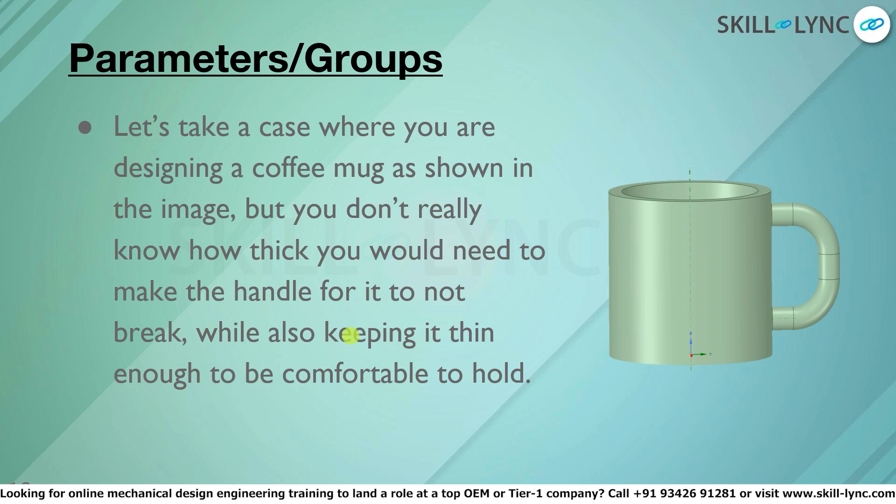It would be useful if we could select a couple of these dimensions or parts of the geometry and define them so we can have a list of them, or have them separately for ease of access. So we can touch upon them in future revisions or iterations, and select those specific parameters or groups of geometry to later edit. Sort of setting them as a favorite to access and edit easily.

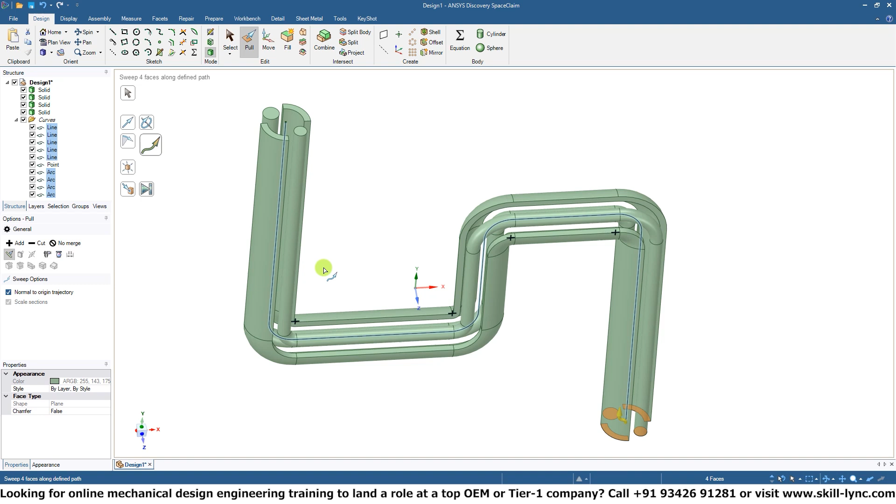Well, this is what SpaceClaim allows us to do using parameters and groups. So let's first go back to our ANSYS workspace environment. Let's select everything with Control A, delete that so we have a blank space, blank sheet.

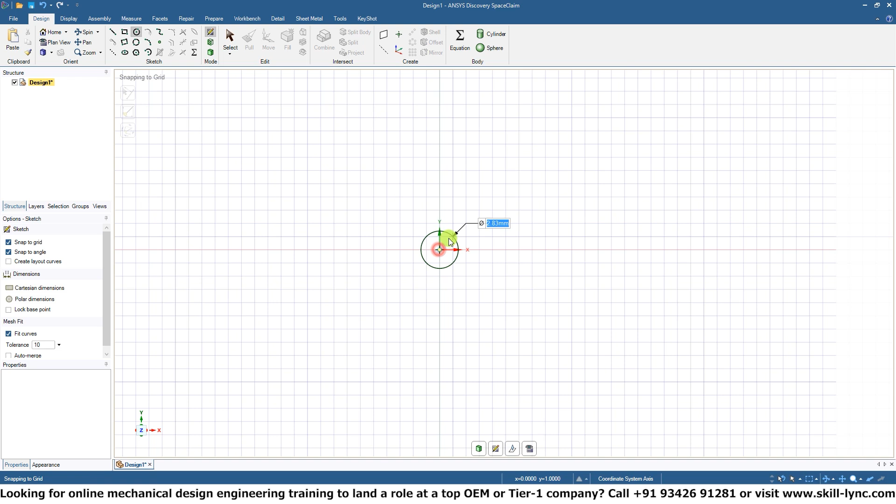Let's go back into sketch mode and try to sketch a representation of this coffee mug. We'll start off with the outer diameter of the coffee mug, and the inner diameter of the coffee mug. Let's extrude both of these dimensions, one there and this slightly.

Okay, now let's do a sketch. Well, first let's create a surface over here. Let's sketch on this new plane that we've created.

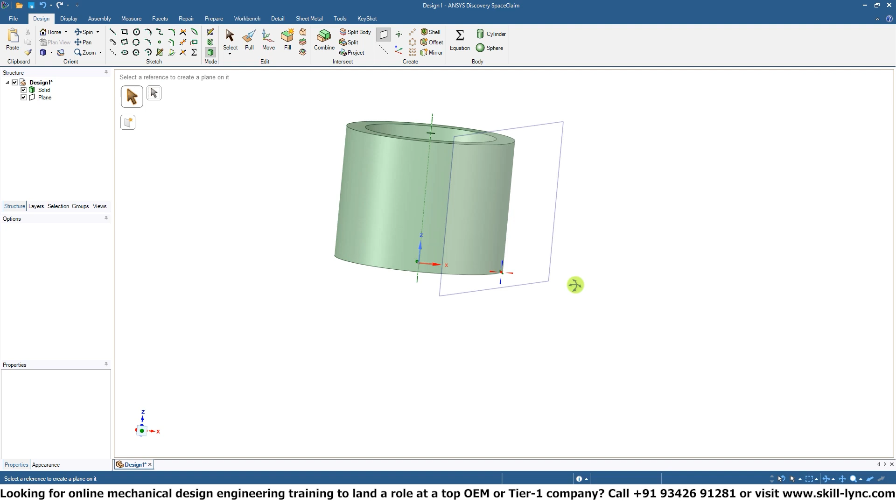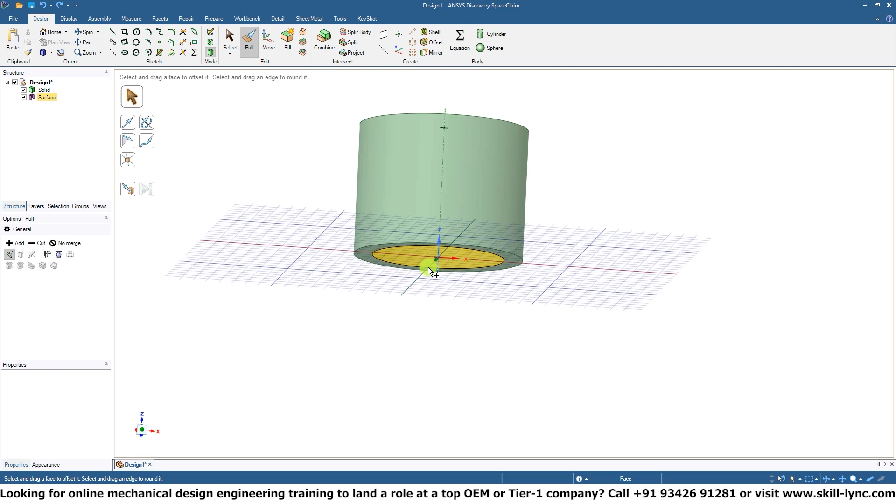Actually, before we create that plane, it might have been better to create a plane around the Z axis. Actually, let's go into sketch mode. Let's do sketch mode, and no, not that sketch plane. I want a sketch plane right through the center of the mug. There we go, just like that.

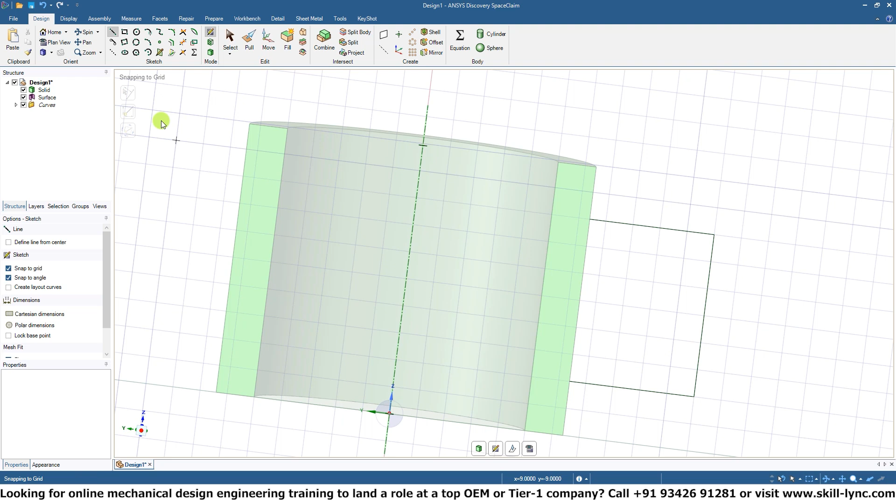So on this surface or edge, let's define the curve for the handle. We'll start from here, go up like this, then down here, from here go up to here. So that should be our sketch plane or sketch area. Let's define one point over here. Let's round off these corners.

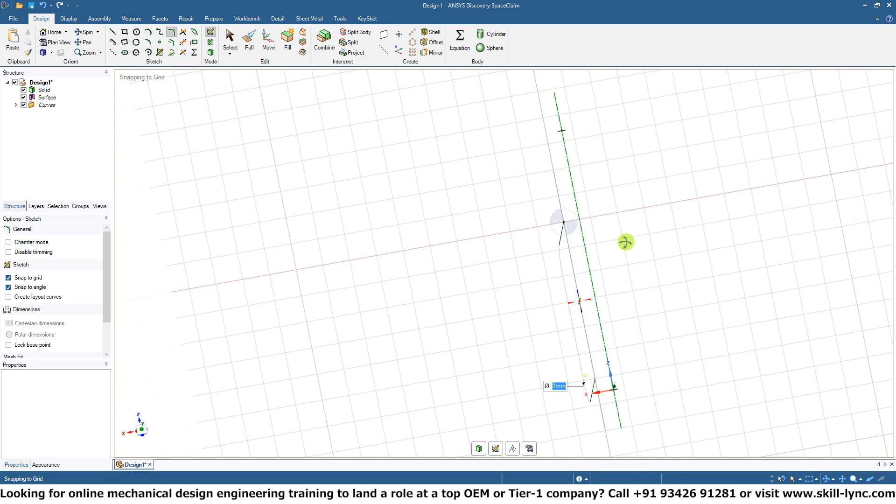There we go. Now let's exit sketch, re-enter sketch mode, but on this plane, on the point right along our handle sweep area. Okay, so what I've done, pretty much - if you struggle to follow along, please refer back to some of the tools or sections we've already covered in this course.

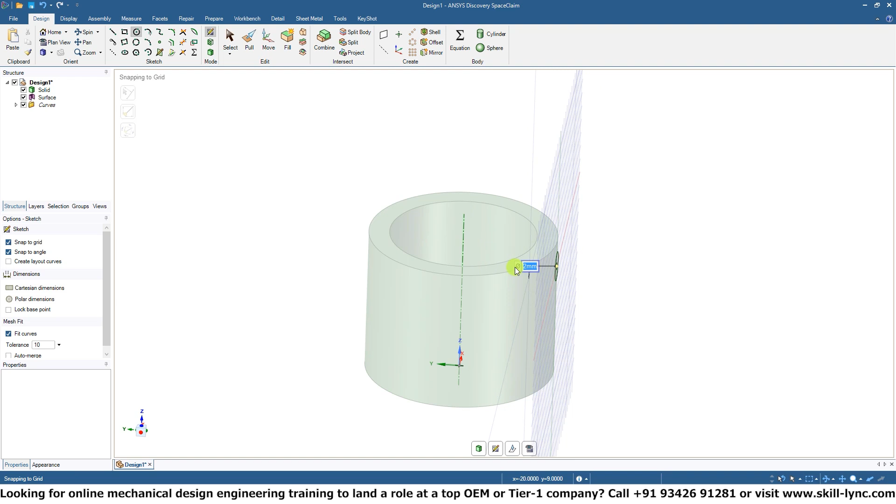Because I've simply done an extrude or a pull on a multiple geometry face to create a cylinder with a bottom for the body of the coffee cup. Then I've defined a sketch plane going through the center of the cup or through the middle, onto which I've drawn the area or sweep path for the handle.

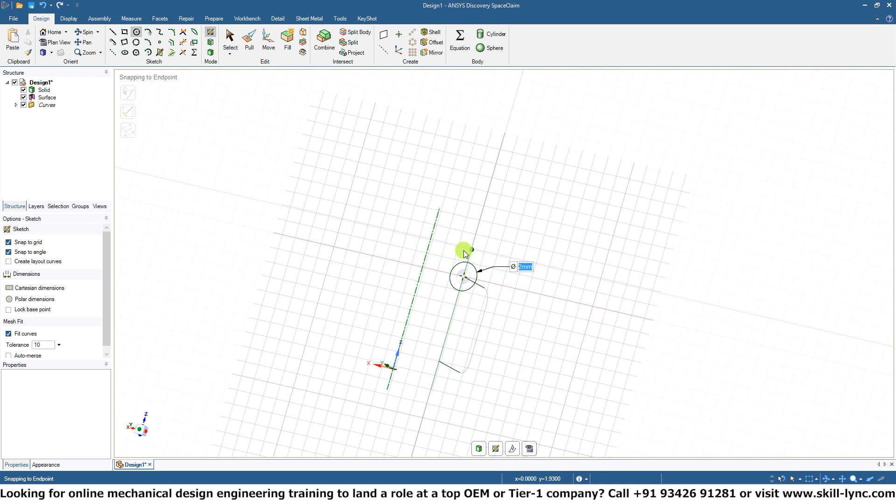I've done a point and selected this point as a new sketch plane, and then drawn a little circle to define the diameter of the handle. And now what I'm going to do is pull this along the sweep path right there to the end. Boom. And there we go. We have the coffee cup.

So now that we have the coffee cup, you can understand - hey, how do we go about actually editing this surface area or this part of the coffee cup? So what we can do, or how we can set the parameter, is if we actually select this area, this area, this area, pretty much the body of the handle of the cup, and select pull, we should be able to...

If SpaceClaim doesn't crash on me. Oh, that's okay. SpaceClaim is struggling a bit.

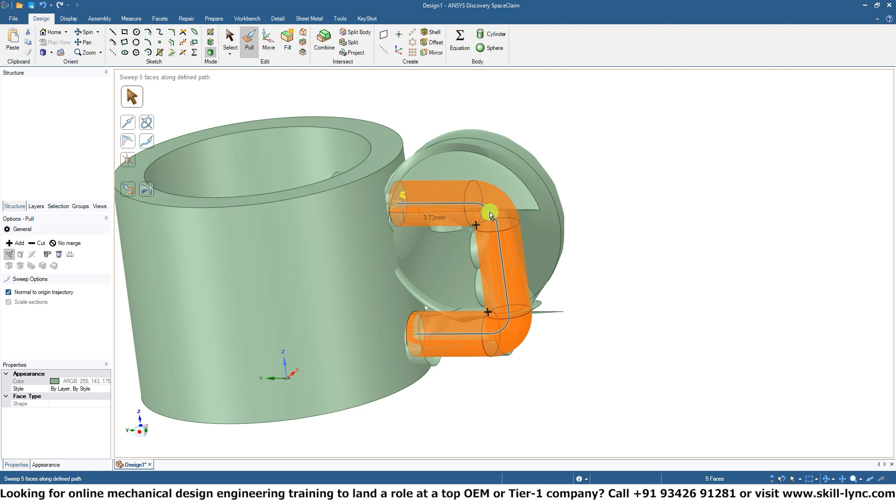Okay, we're back here. As you can see, if we've selected these bodies, or the body of the handle itself, we can use the pull tool to adjust the thickness of the handle.

The reason why SpaceClaim was having problems is, in this area where we have the radius of the handle in the corner, if you go above that radius, SpaceClaim fails to create that geometry, and that's why it was having a few issues and bugging out.

But just by pulling or selecting that geometry, you can see we have the text box appearing for the radius of the handle, which we can take up to, I believe, 1. You can edit this again just by typing in dimensions like 0.3 or 0.7 and editing the thickness.

However, next to all of the text boxes with dimensions that we've seen up to now, we see a little box with a P next to it. This is a parameter, or this is the groups that we are discussing right now.

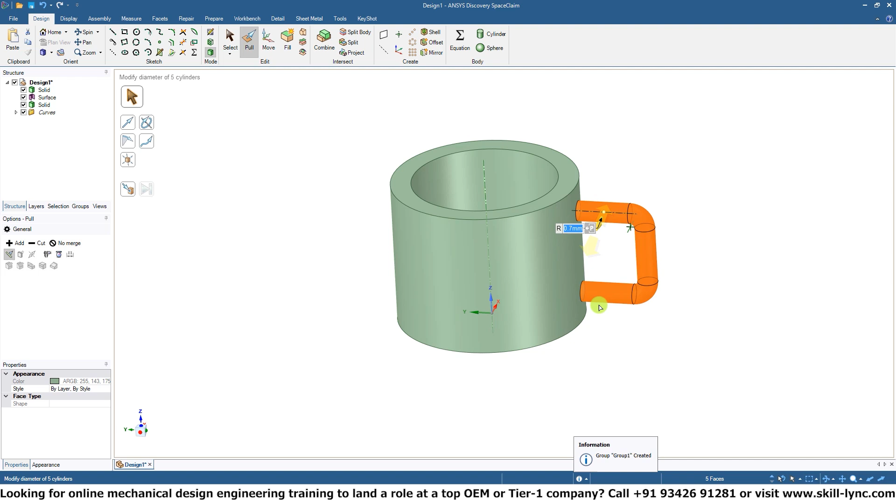If you click on this, you can see over here in the dialog box it says Group 1 has been created. So something happened. But where do we find this Group 1?

Well, if we go on the left-hand section, over here where we have the structure tree, there is a little tab for groups. If you click on that, it shows you all the different groups that you've defined. This is Group 1, which is the thickness of the handle that we have just defined.

If we click on this group, you can see that currently the value is at 0.7 millimeters. And if we click on this blue value, we can change this and set it to 0.3 if we wish, and it edits the geometry in real time.

So why is this useful? Why can't we just select it and use the text box? You can do that if you wish, but let's say we do certain different functions.

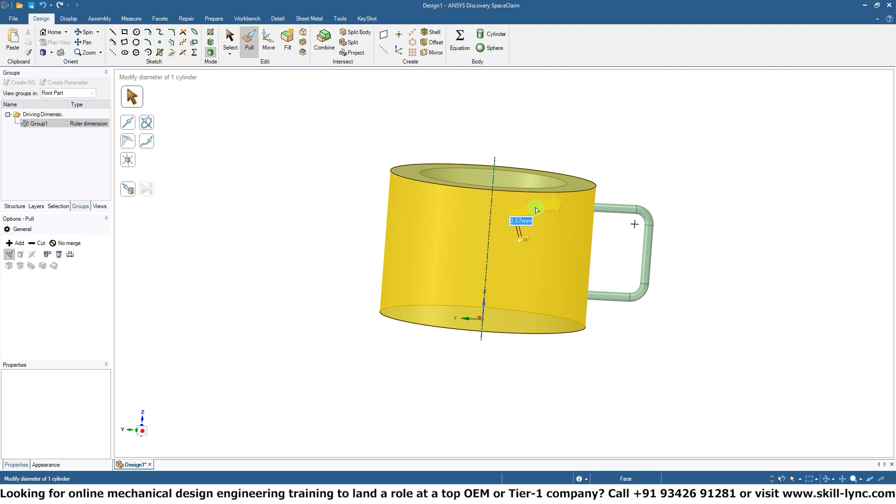Let's say we shorten or lengthen the cup, or we widen or narrow it down. And then we want to come back, or oh, I've just realized we didn't have a base on the cup. We've just added a base right now. And then let's say we want to go back and edit this. Well, if you have a group defined, you can simply go back and quickly edit it without having to reselect the whole body, the whole geometry.

You can even define it, yeah, you can rename it. Instead of Group 1, you can say handle thickness to define it like that.

You can also define, let's say, this internal diameter over here. Let's parameterize this, another group. Let's rename this, put internal diameter, 5.88. Let's see if we can change that to 5. How does that change? Yeah, makes it a bit smaller.

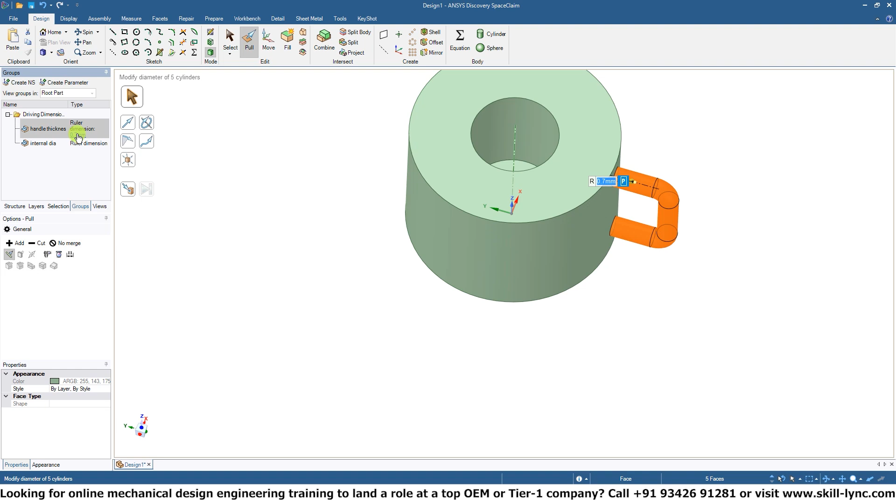Can we change it to, let's say, 3? Changes the internal diameter. Now let's say we want to make this skinnier, 0.1. There you go, a skinnier handle and a thicker wall.

You see how quickly I'm editing these dimensions or parameters without having to reselect all the different areas. This is the power of SpaceClaim, or the power of groups, because you can easily and quickly edit such dimensions or parameters. What about this one, the thickness of the bottom?

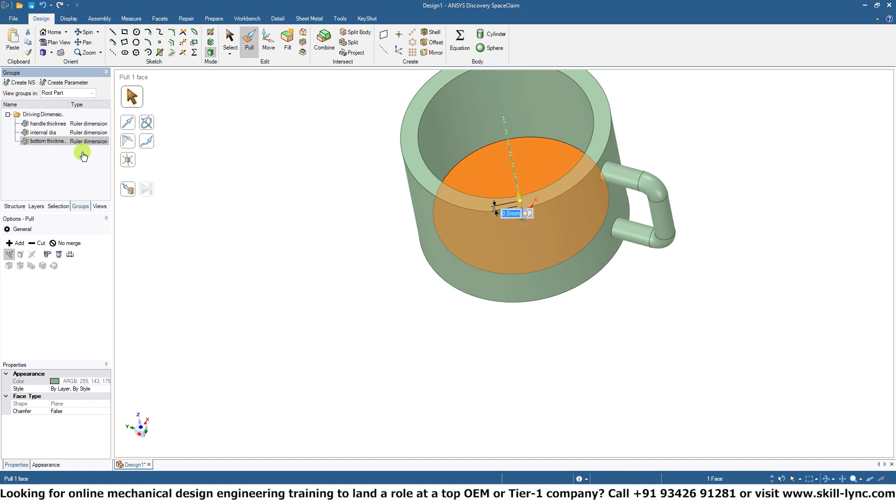Yeah, we can also define this one. Let's rename this and say bottom thickness. You see you can easily reference or go to the different areas that you have selected and edit all of these dimensions in real time without having to fiddle around and reselect the specific geometry.

You can have a sort of favorites bar over here of all the different areas that you'd like to edit or play around with later on.

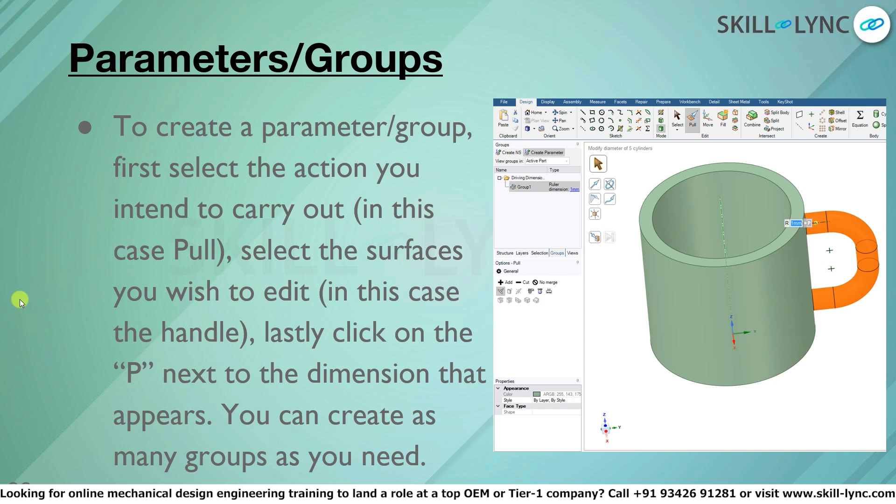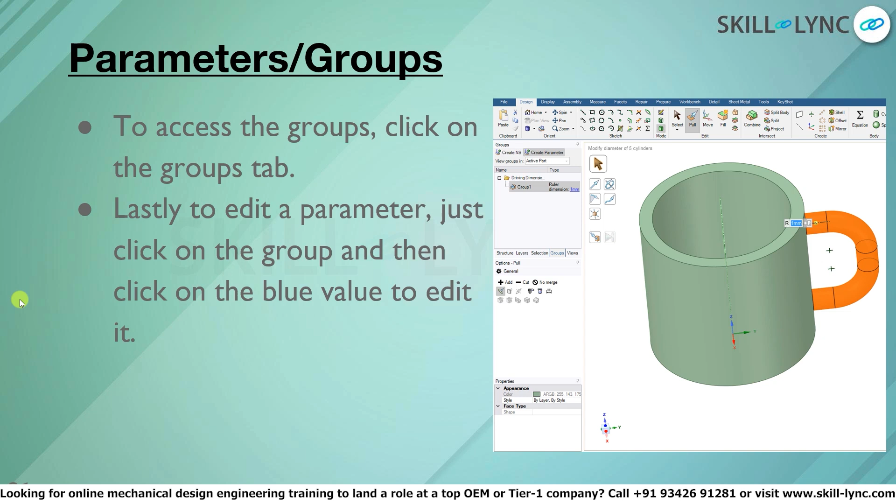Parametric modeling in essence. Let's go back to our PowerPoint presentation. So this is what we just discussed, how you can define the parameters, how you can access the groups. You can have as many groups as you like, and you can rename the groups so you can easily remember what you're editing or what you've defined as a parameter. That's it for the parameter and groups tool.

Moving on, in this section we are going to be discussing the move tool. What is the move tool? Let's consider the example given on the right, this coffee mug that we've been editing and creating, and we'd like to edit how close the handle is to the coffee mug body. How can we achieve this? Well, we could set and define a parameter, but there's a much easier option that SpaceClaim offers us. We could do a pull over here to bring it back, but that's too complicated and it cannot give us the desired option that we want.

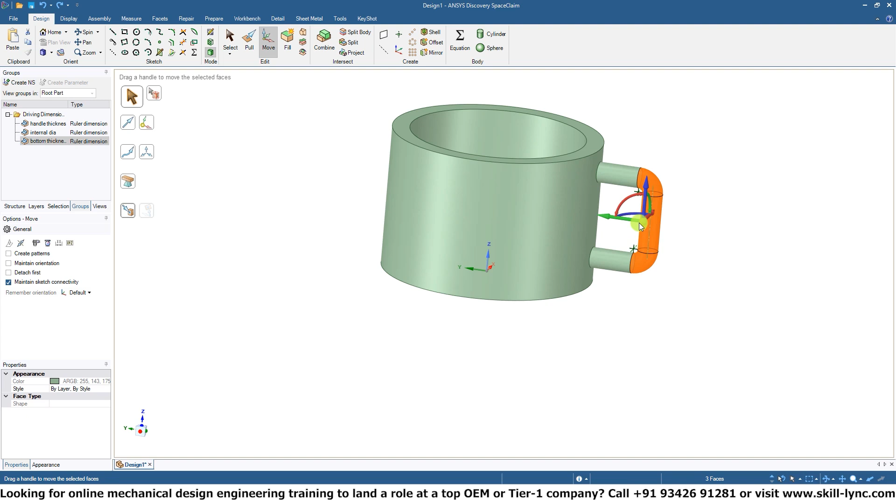However, if we select the move tool, this will allow us to select different bodies that we'd actually like to move around. Let's select this area because this is the section that we'd actually like to move. Once we've made our selection, if I move this around and zoom in, you can see that a set of axes appear on our model. Now these axes show us all the different 3 axes of freedom that we can move our geometry about.

So let's say we actually want to move this handle towards the cup body. If we select this green arrow, hold and drag along it, you can see it starts to move this geometry, and it would autocomplete the surrounding geometry related to it, moving it along the axis or along that direction.

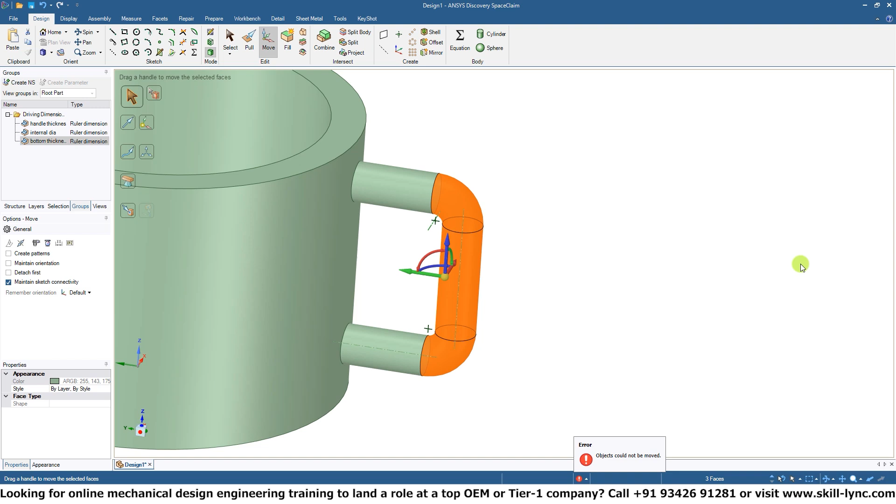The same you can do with some of the other axes, but because these bodies are connected to these bodies, you can't shift it up or to the side. It says the object cannot be moved because that breaks the geometrical relationship, so we can't move this orange highlighted bit to the right as it would not be connected to this bit anymore.

These arcs that we have over here would usually be related to rotating features around the mug or around the object. Let's see if we can select a different thing to be edited. How about this? Let's see. Can we rotate this? Yes, we can.

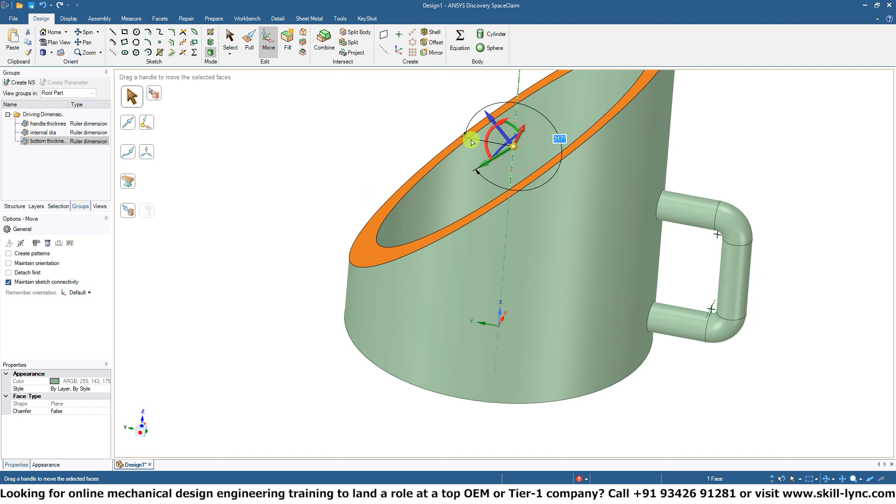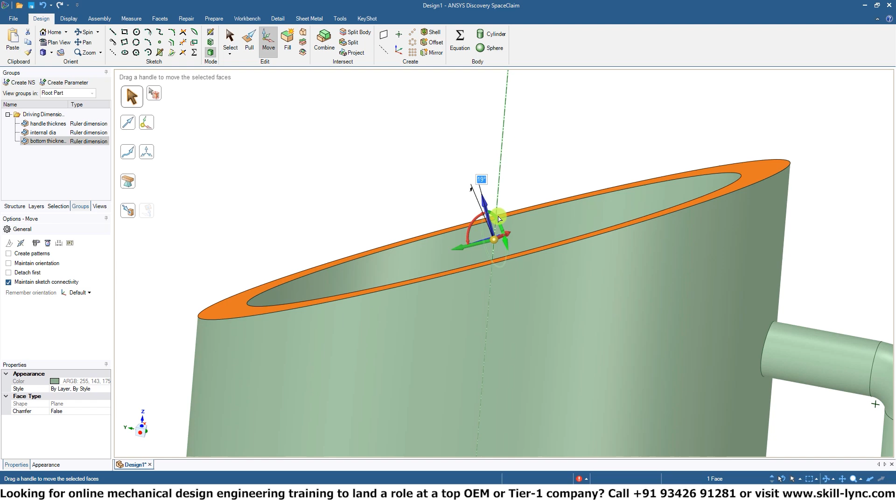So you can see this little extrude or this little cut that we have over here. If we select the arc, let me move in closer. If we click and drag along this arc, it will rotate the feature about this red axis over here. The axes are color coded, so you can easily understand what you're rotating about where. The green arc rotates about the green axis, blue arc rotates about the blue axis, red arc rotates around the red axis, and so on and so forth.

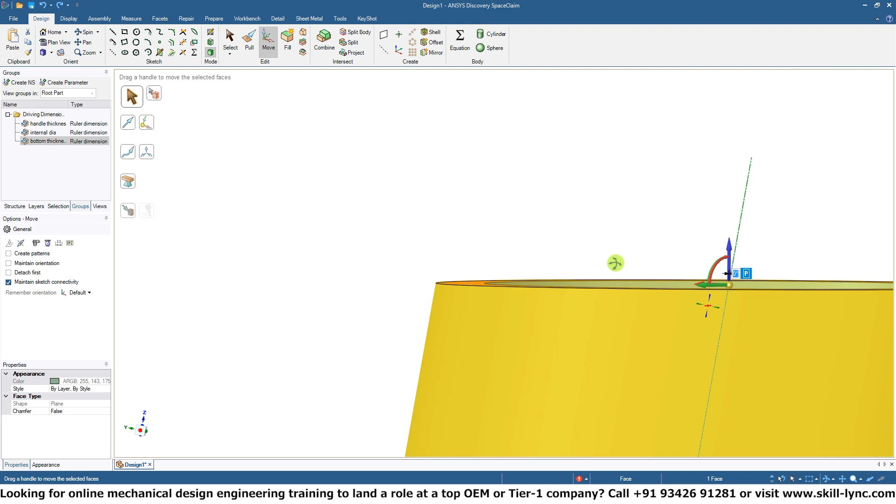So have a play around with these. You can achieve some very interesting effects using these techniques, and it allows you to move some features around really easily. If we move this about, we can even, as an example, if we select this feature, would this allow us to move it down? No, but what if we select both of these features because they're connected?

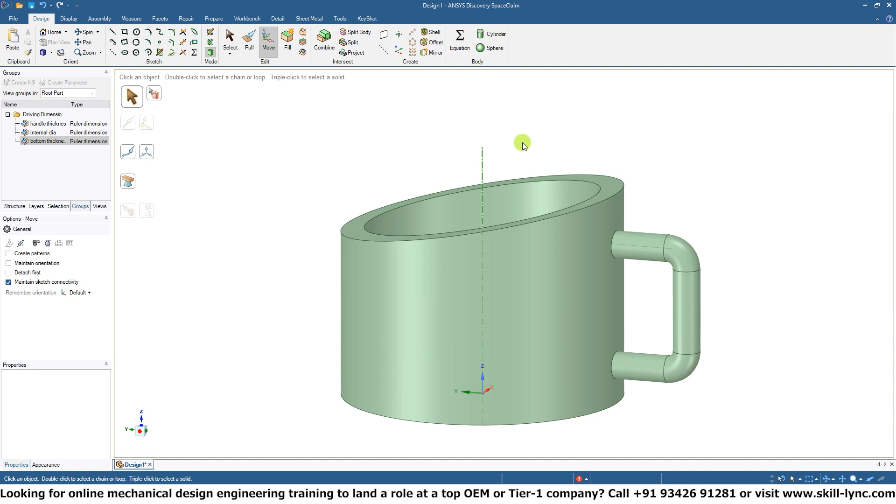Now this would allow us to move it down. So you have to be relatively clever in your selection, because SpaceClaim can infer and can autocomplete certain tasks or certain motions, but it doesn't know or understand everything, and this is displayed by the move tool. So if you want to move this section solely, this section won't be altered, so it can't do that.

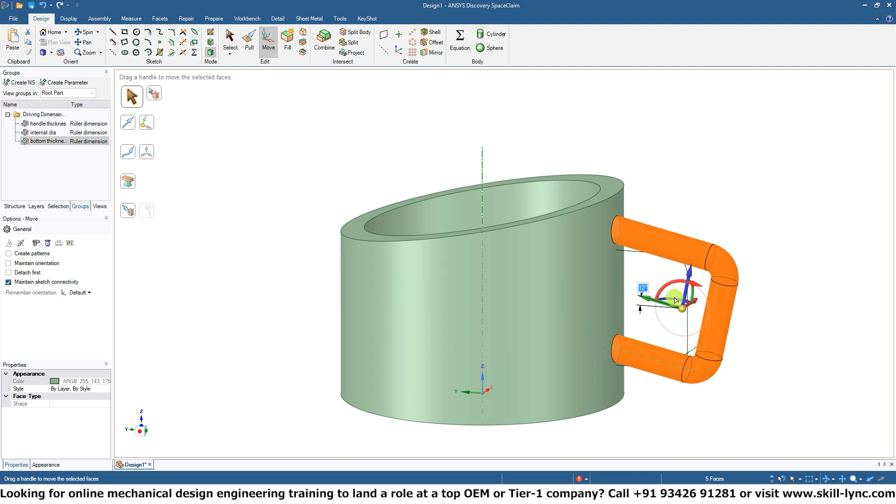But if you actually want to move this section down, you can simply select this section and then move it. You can see that that edits it. Or if you simply want to move the whole handle about, you can also do that. If you select the whole handle, you can move it up, you can move it down, move it out, move it in. You can rotate it a bit to give it a certain arc or flare, if you so wish.

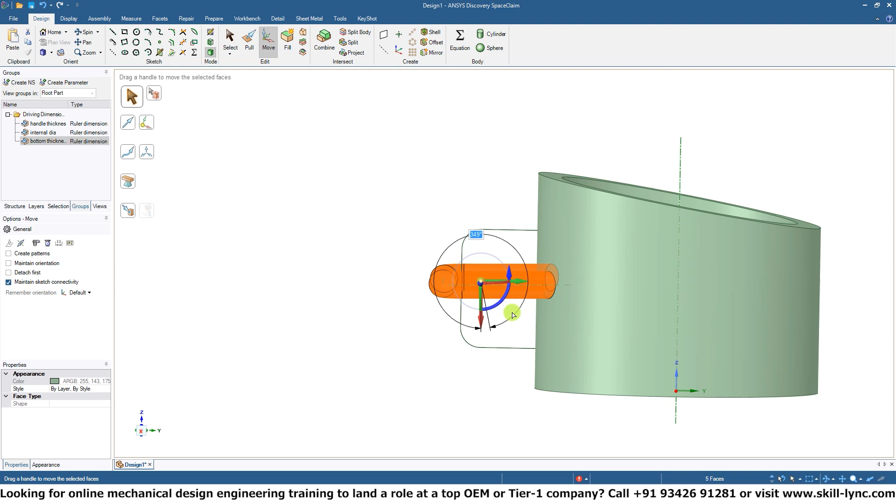I believe you can also rotate it sideways. You can see that Space Claim sort of does autocomplete, it does most of the work for us. These certain features can help with quickly editing your geometry or editing features in your 3D geometry quickly and easily. However, it's also very important to understand what's going on behind the scenes in case you get an error or get stuck.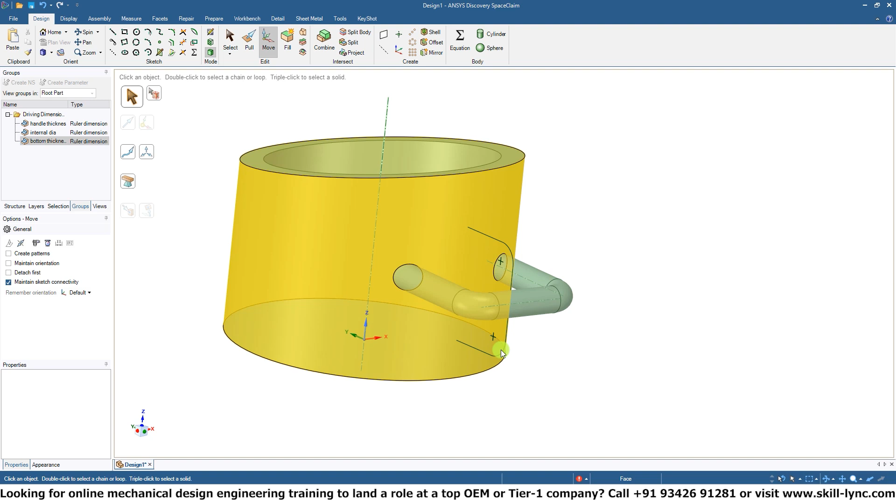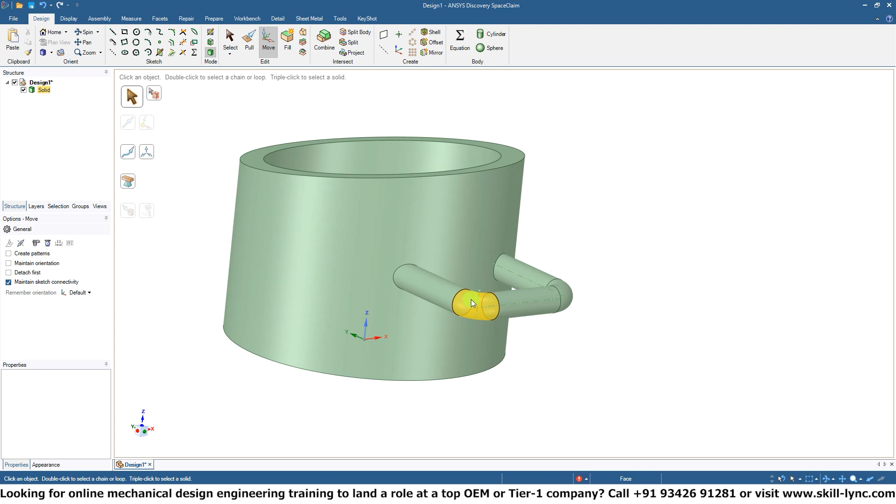But as you can see, using these tools we can quickly make alterations. This geometry left here is the line bodies that we've defined as the sweep path. It would have been better if we used construction lines, but just for this demonstration I created this arc. However, if these curves bother you, you can select them from the structure tree over here - the arc, the point, these lines - and delete them and they go away. But be careful, because once you delete them you lose the reference geometry that you used to create your sweep body. So only do it once your geometry is finished and the way you want it.

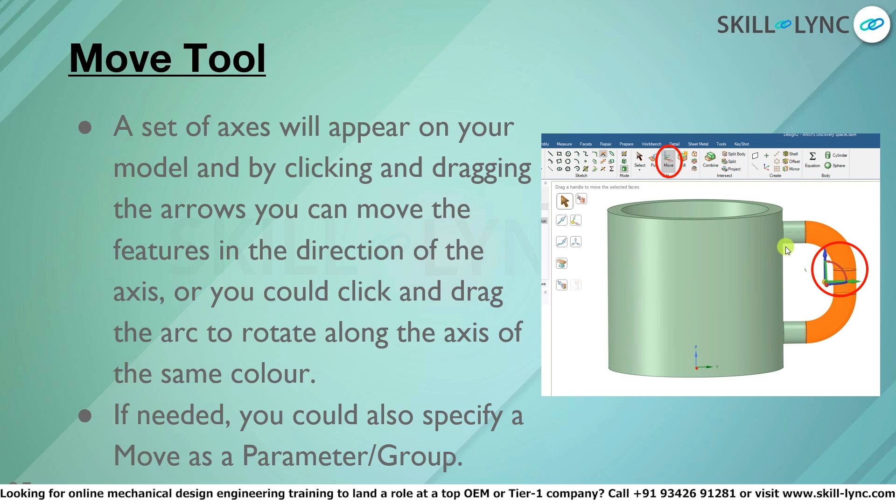So we've discussed the move tool, we've discussed how we can move certain specific features, we've discussed the different parts of the axes of the move tool. I forgot to mention that you can also, if you wish, define a move motion as a parameter. You still get the text box with the value that you can edit over here to define the motion. You can also do negative values if you want them to be in the opposite direction - minus one will go in the opposite direction. And you can define this as a parameter as well.

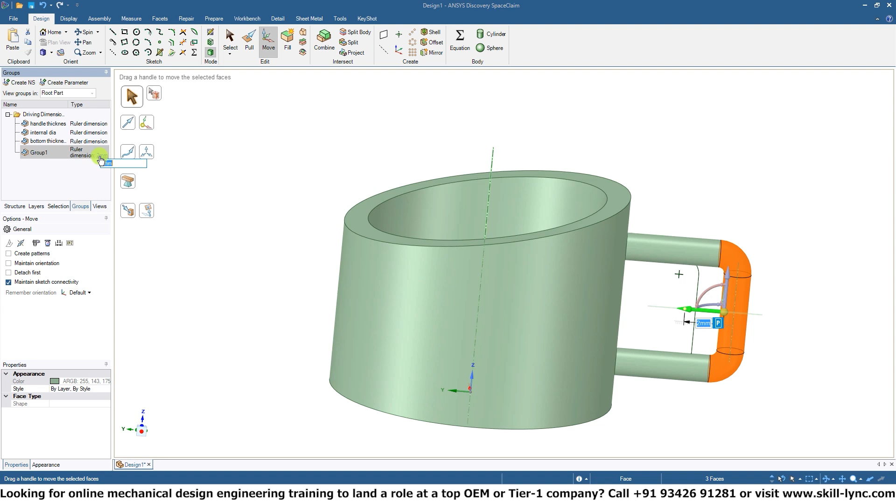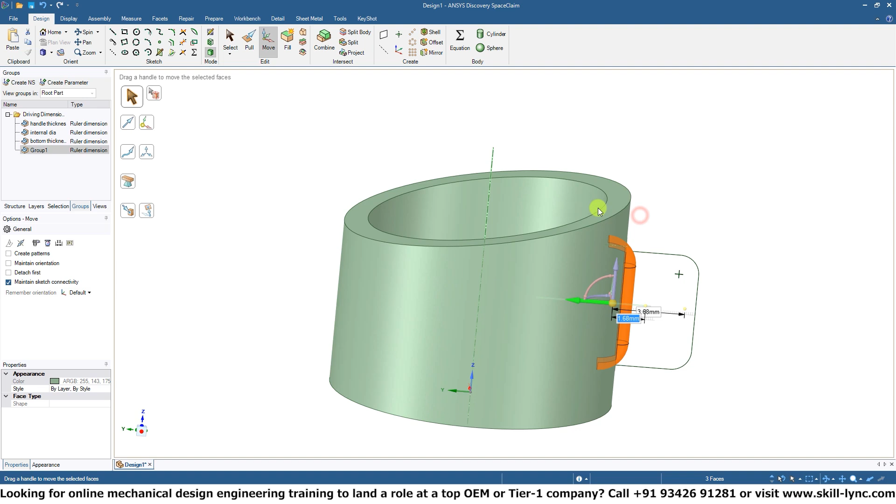Now, if we go back into the groups and parameter section, this parameter actually moves the handle closer or farther away from the coffee cup. So let's say you want it relatively close to the coffee cup - you can put -2 to change the direction. If you put -2 again, it will move farther away. You can also change the thickness of the handle to suit your needs. Now let's say you want a thinner handle, but closer to the mug - you can easily achieve that. So parameters don't simply work on dimensions, they also work on move options and other things. As long as what you're editing has a P next to it, you can define it as a parameter.

Now let's move on to the first exercise of this week. I would like you to create the CAD model of the coffee cup that we've just discussed, as per the image. I would like you to create a set of parameters and groups for the handle thickness, the cup outside diameter, the cup inside diameter, and the cup height. I would also like you to create a parameter for the vertical handle position along the cup. This should be relatively easy if you've been following along through the lesson - we've already demonstrated how to do some of these things, but now it's up to you to work through this exercise.

Make sure you define all of your parameters. You can give your cup an interesting shape - it doesn't have to be circular, it can be a square cup. You can define a special cross section to the cup if you wish. But all I want you to do is define a couple of these parameters for the wall thickness of the cup, the handle thickness, the handle position around the cup, and the cup height, just so you get used to all the modeling tools we've discussed up to now. I would like you to get more familiar with parameter definition and editing, because this will help later when you're creating your own 3D models to define key parameters, key dimensions, key characteristics, which you can later easily and quickly edit.